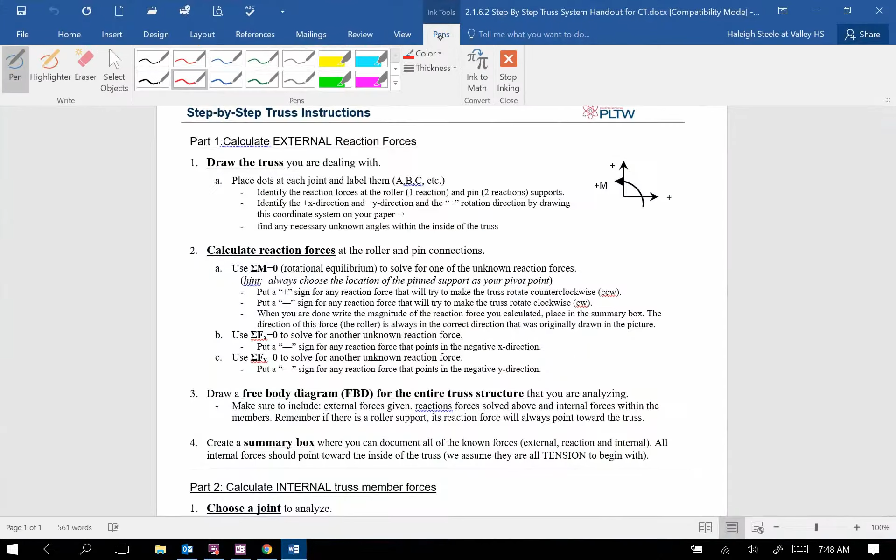So let's look at our first example, and we want to make sure we walk through these steps. The very first thing that we are going to do is draw the truss. We're going to place dots at each of the joints and label them, and identify the reaction forces at the roller and pin support, and find any necessary unknown angles within the truss if they are not given. So let's do those steps first.

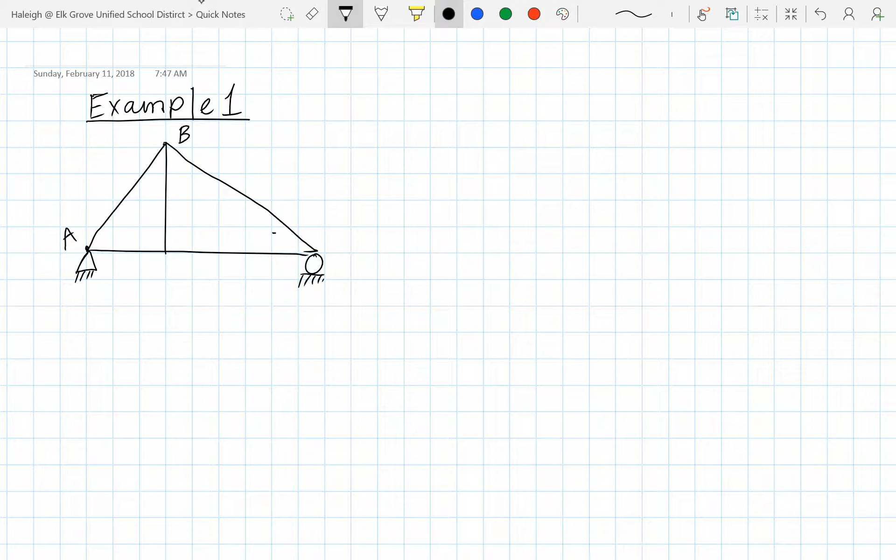So let's draw our truss. Let's say here is example 1, and it's going to look something like this, with a pin support over here and a roller support over here. Let's label the joints A, B, D, and C. There's going to be an external force on joint D.

Let's say it's 500 pounds. We'll just call it F1. And let's put some dimensions on this truss. This is usually given to you. So let's say from A to D, this is 3 feet. The distance from B to D is 4 feet. And from D to C is 7 feet.

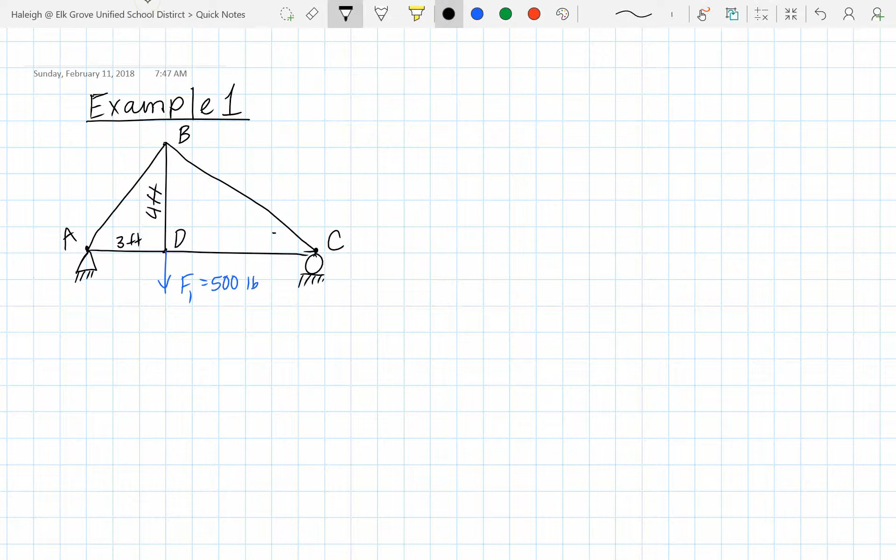Well, to do any truss calculations, you need at least one angle in each of the right triangles you see. So that would mean we need this angle here and this angle here. So let's find theta A, angle of A. So that's the step we're on, is find the angles.

So to find theta A, we can see that relative to angle A, we have the adjacent side, which is 3 feet, and we have the opposite side, which is 4 feet. So we're going to be using tan. Tan of theta A is opposite over adjacent, which means tan of theta A, now we plug in our values, is 4 feet over 3 feet. And to find theta, we need to take inverse tan. So theta A is inverse tan of 4 over 3.

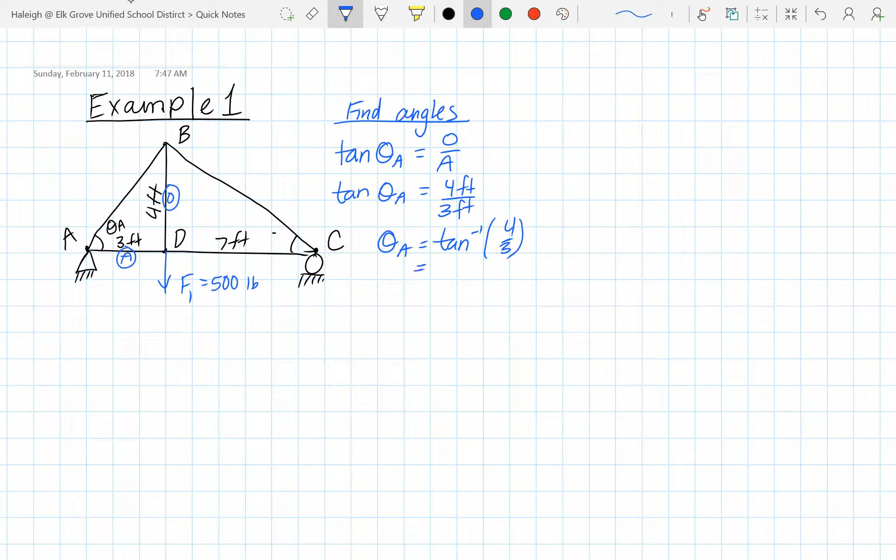When you plug that into your calculator, make sure you use inverse trig functions. I recommend doing this at the same time that I do it. Use your scientific calculator, you get 53.1 degrees. Okay, so let's replace that theta A with the correct value. So this is 53.1 degrees.

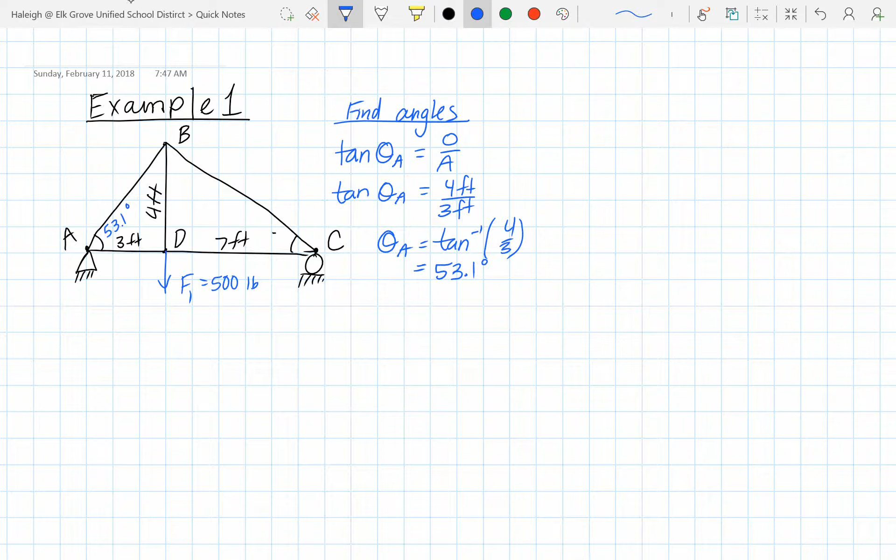Let's do the same thing, but this time for theta C. Well, for theta C, 4 feet is still our opposite side, and 7 feet is our adjacent. So we're going to use tan again. Tangent theta C is opposite over adjacent. So theta C is going to be inverse tan of opposite over adjacent. Let's plug in our actual values. We get 4 over 7. And if you plug this into your scientific calculator, you get 29.7 degrees.

All right, let's go back to our step-by-step instructions sheet and see what's next. Well, let's see what we've covered already. We did this, draw the truss, we placed dots at each of the joints. We found unknown angles, but we didn't identify any of the reaction forces at the roller and pin.

So let's do that. Okay, so our reaction forces, we know there are two at a pin support. We know there is an up reaction force and a horizontal reaction force. And on a roller, there's only a vertical reaction force.

So we call this reaction force. Since it's at joint A, we're going to call it RA. And since it's up, it's going to be, or in the vertical, it's going to be RAY. This one is also RA, but since it's horizontal, it's RAX. This one is vertical, so it's RCY.

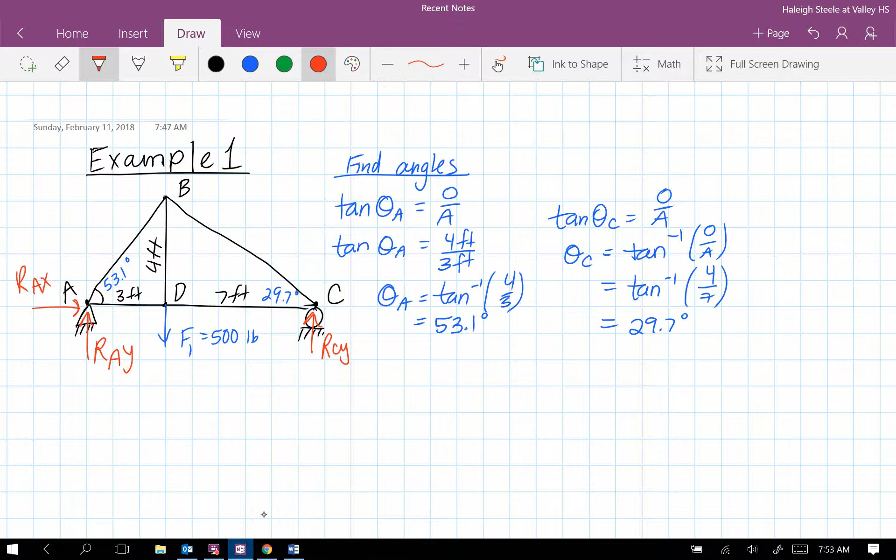Okay, we always assume that the reaction forces are in the positive direction. So for the vertical component, it's always up. For the horizontal, it's always to the right. Okay, let's see what's next.

Okay, so we are now on step 2, which is calculating the reaction forces at the roller and pin connections. How we're going to do that is summing up our moments to find one of the reaction forces. We want to make sure that we always choose our pin location as our pivot. It's really important because that has two reaction forces, and that way we can eliminate two of them right off the bat because they are no distance away from the pivot.

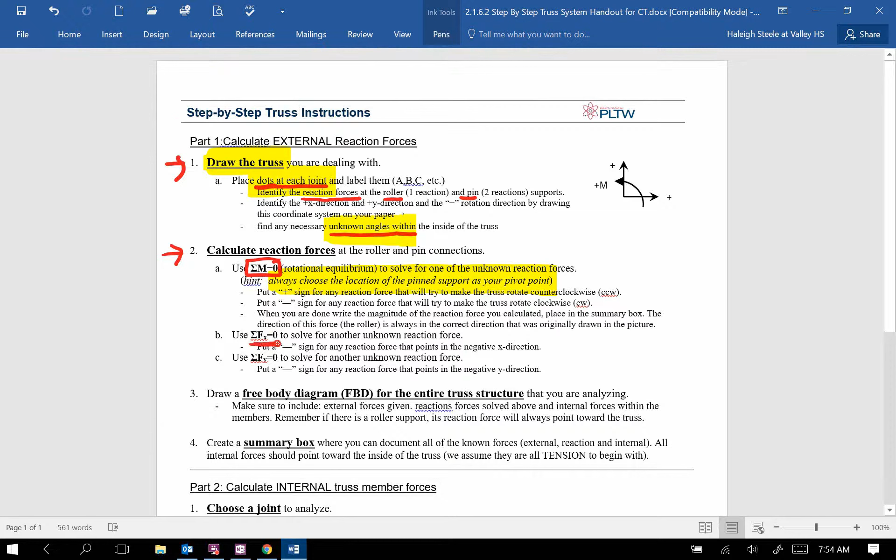Okay, so let's do this. We can go ahead and talk about these next two steps also, which is summing up the forces in the x direction and summing up the forces in the y to find the unknown reaction forces.

Okay, so we want to sum up our moments. Since we set point A as our pivot, there is no moment due to RAY or RAX. There is going to be a moment at point D because there is a force applied at point D, an external force, and there's going to be a moment at C because there's a reaction force, and it is a distance away from point A.

Now we need to identify which is positive and which is negative. We need to make sure we look at our coordinate system, and we know that counterclockwise is positive. So if we apply a force at point D, that's actually going to cause the truss to rotate clockwise. So that is going to be a negative moment. Add a negative sign in front of MD.

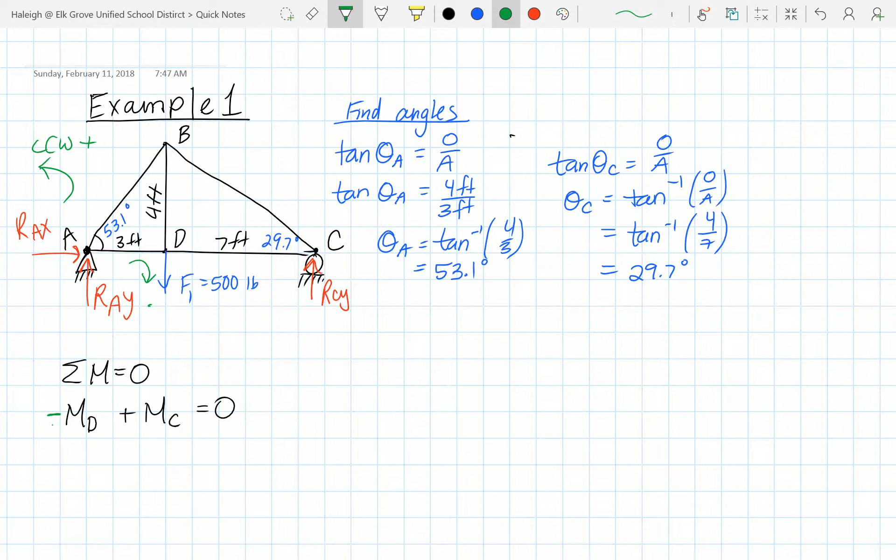And if we apply a force at point C, that moment is going to be counterclockwise, so it is positive. Now we can go ahead and actually use the equation for a moment, which is just force times distance.

We're looking here at the force applied at point D and the distance from D to the pivot point, which is point A, plus the force at point C times the distance from C to A. Don't forget that our force is always perpendicular to our distance. So since our two forces we're talking about here are vertical, we're going to be dealing with horizontal distances.

Let's plug in anything we know. We know the force at D is 500, so let's plug that in: 500 pounds times the distance, which is 3 feet, plus the force at C. Well, we don't know that, but we call it RCY based off of our picture. And we do know the distance is 7 plus 3, so 10 feet to point A.

Let's set that equal to 0, then let's solve. So we get negative 1,500 foot-pounds plus 10 feet times RCY. Well, we want to solve for RCY, it's like our unknown, it's our X. So we need to add 1,500 to both sides.

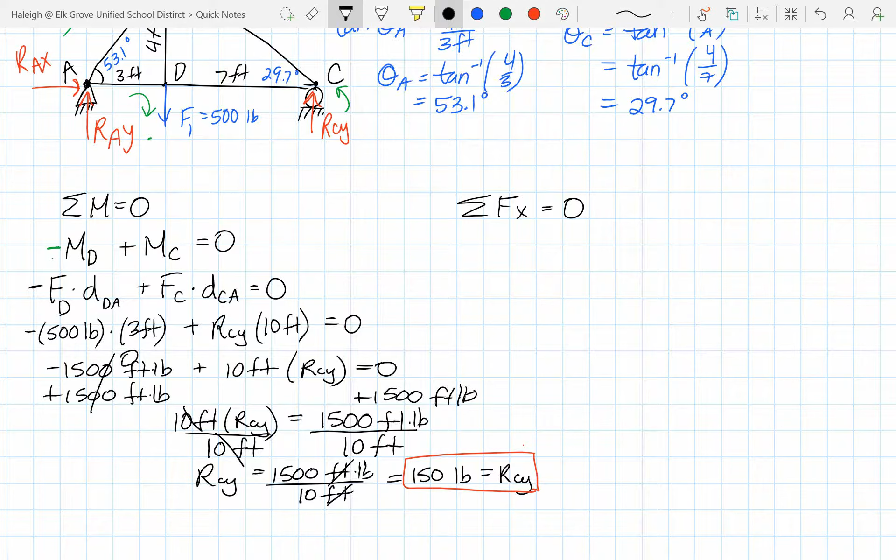Now we're going to follow the next steps, which is sum of the forces in X and sum of the forces in Y must equal 0. Let's deal with X first. Looking back at our picture, we need to look at any of the forces that are in the horizontal. Well, the only force is RAX. Since there is no other, that means RAX must equal 0 pounds. Let's box it because we're going to need it later.

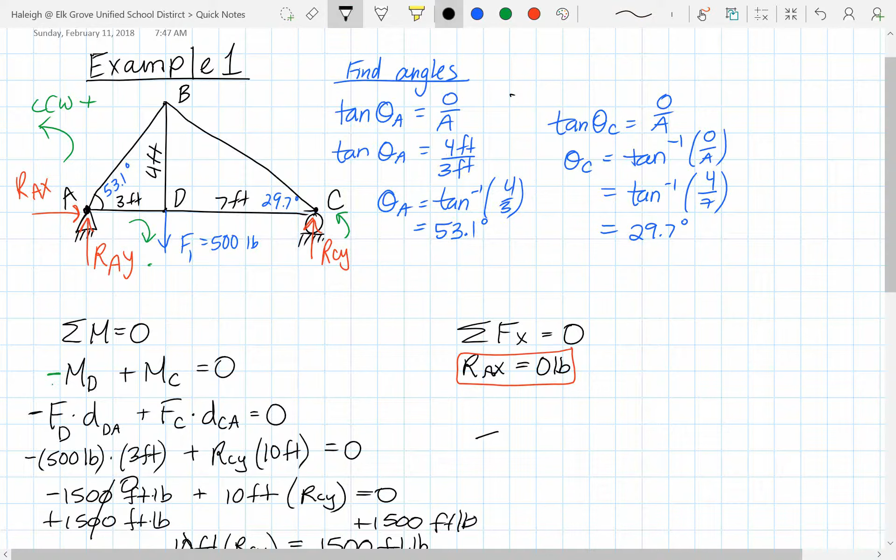Now we want to sum up our forces in the Y. So we need to write all of our forces that are in the Y direction or the vertical, which if we look at our picture, it's RAY, 500, and RCY, which equals 0. Don't forget to make anything negative that's pointing down. So in this case, the 500 is pointing down, so it's negative.

Let's go ahead and fill in anything that we have already found. In the previous step, we found RCY, so plus a negative 500, same thing as minus 500, plus 150 equals 0. If we add negative 500 plus 150, that's really negative 350. So we have RAY minus 350 equals 0. To get RAY by itself, we add 350 on both sides, so we get RAY equals positive 350.

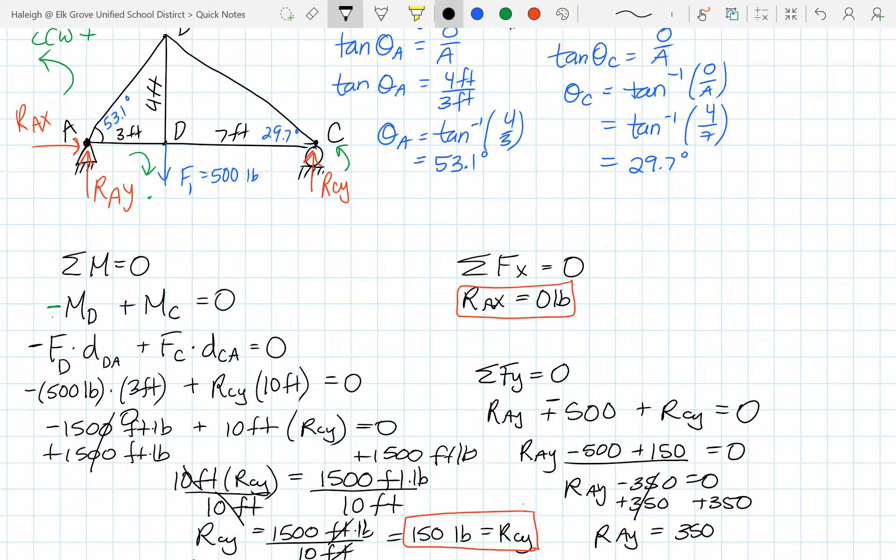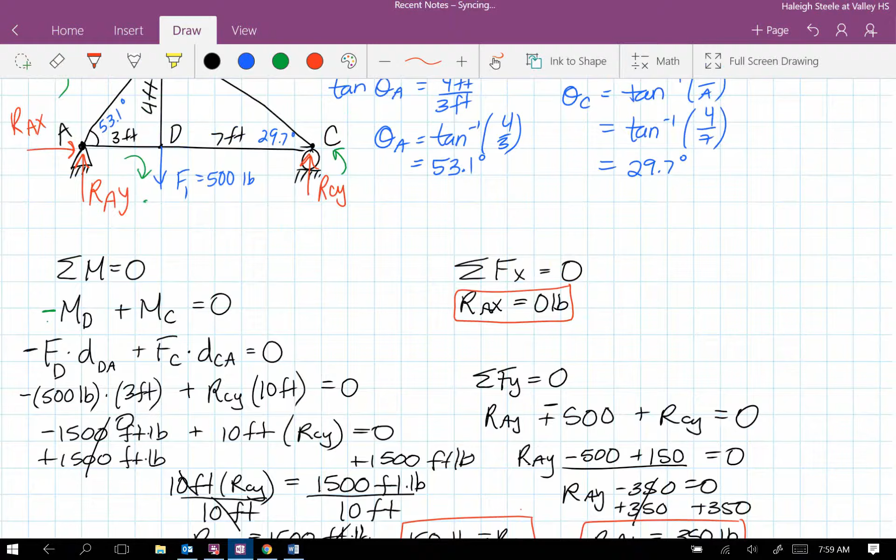There's another force, so we want to box it. All right, we have found all the reaction forces, and we know the external force is 500. So let's go back to our step-by-step instructions and see what's next. We are moving right along to step 3.

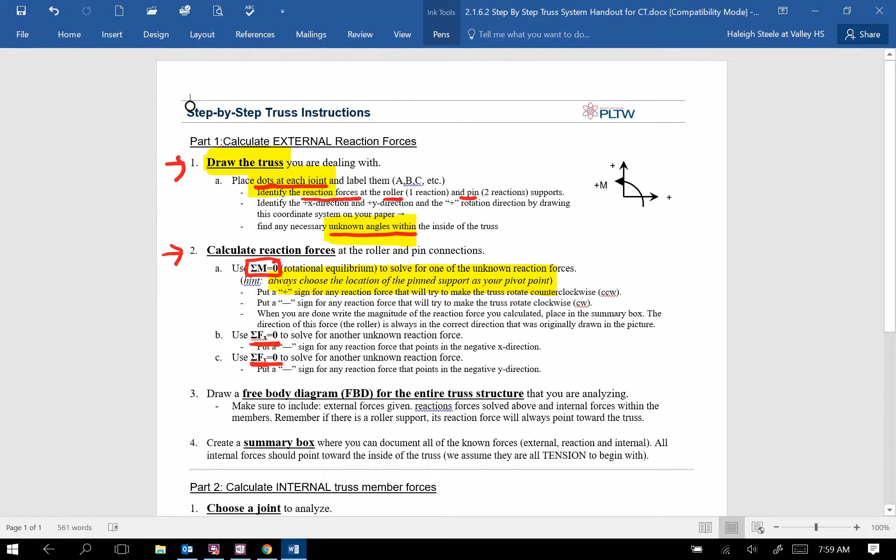Step 3 is to draw a free body diagram for the entire truss structure you are analyzing. We want to make sure we include all external forces, reaction forces, and internal forces, which is the new part. Internal forces are the forces that exist within the members. Let's do that.

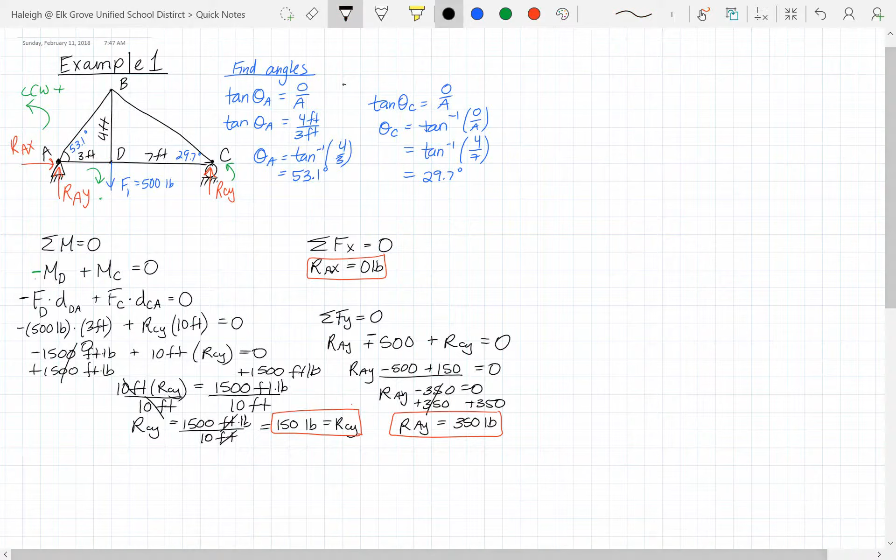I like to basically just draw all the joints first, relative to each other. We had joint A here, joint B up here, D right below point B, and joint C off over here. So we can kind of see it's in the formation of our actual original picture.

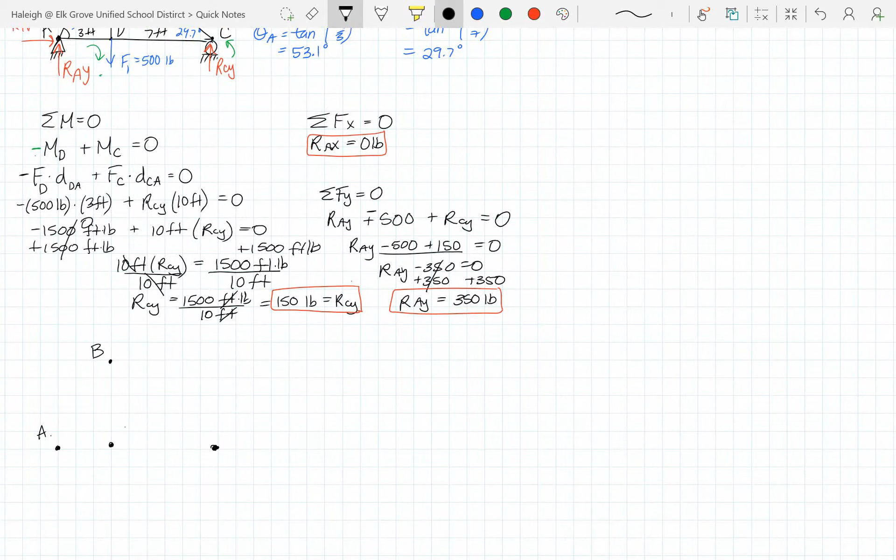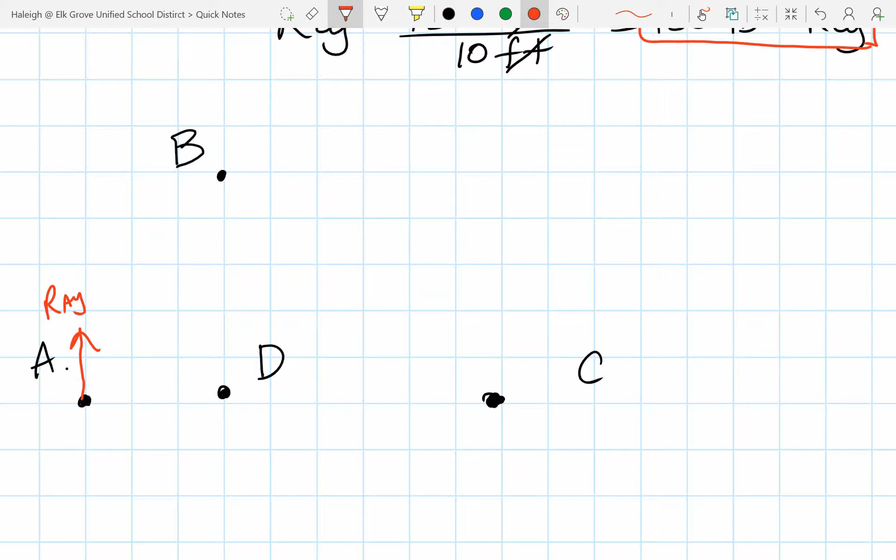Now let's draw our reaction forces first. On joint A we had RAY, and we knew it was up, so we point it up. At joint C we had RCY. We did have RAX, but since we calculated it to be 0, we're not actually going to draw it on our free body diagram because the force is 0, we don't need to draw it.

So let's draw our external force. At joint D we had F1 down.

Now we need to draw all the internal forces. Between joints A and B, there's a member, so we're going to have a force pointing in towards the joints. Since it's between points A and B, we'll label it FAB. Same thing with this one, FAB. It doesn't really matter whether you call it FAB or FBA.

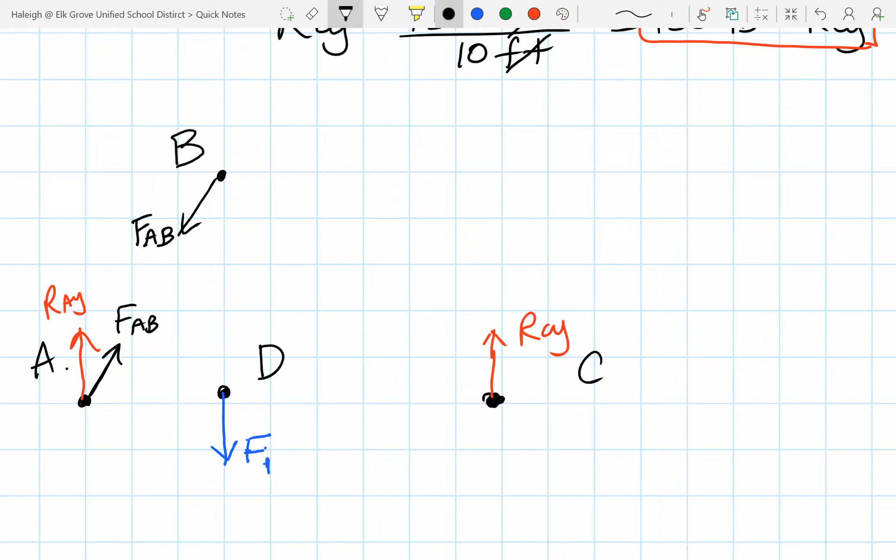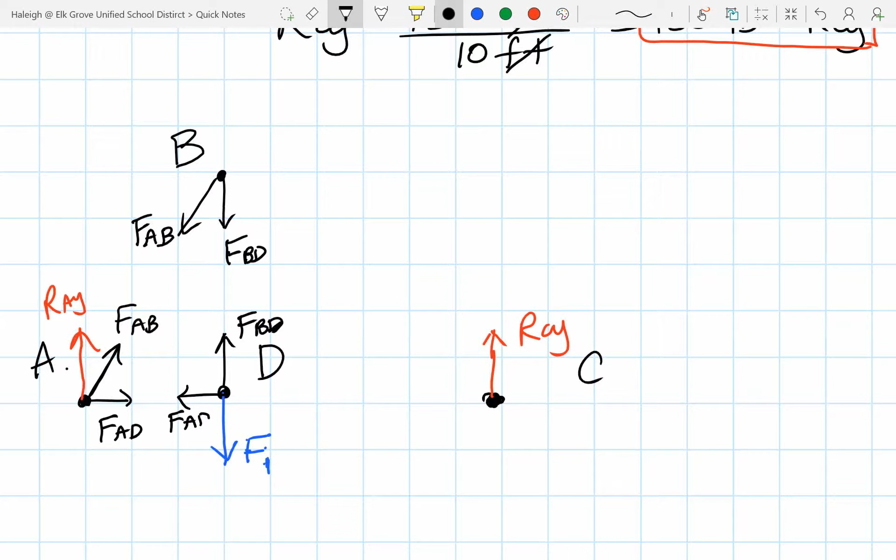Between B and D, always point the arrows toward each other, we always assume positive. So FBD. Then between joints A and D, we have FAD. Two more: we have FDC and FDC. And between joints B and C, FBC and FBC.

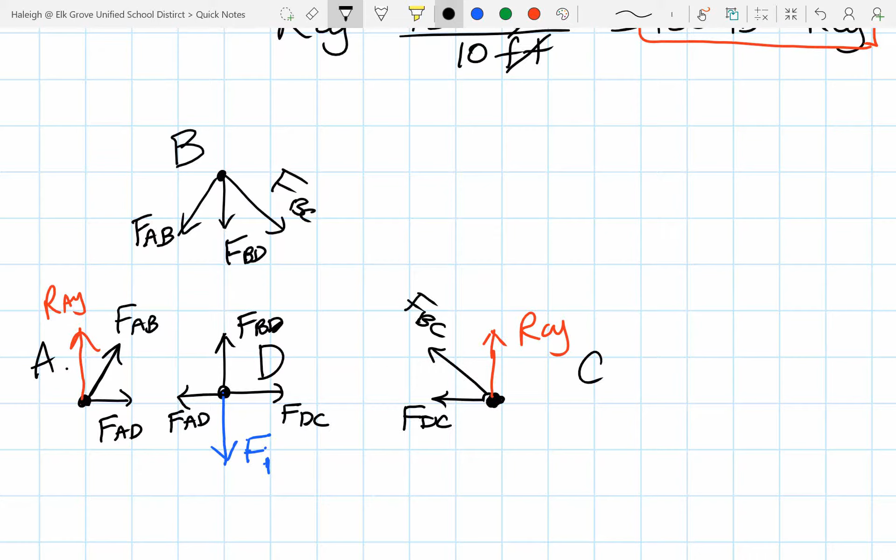Let's go back to our step-by-step instructions and see what's next. So we did our free body diagram. Let's make sure we create a summary box next, where we can document all of our known forces: external, reaction, and internal.

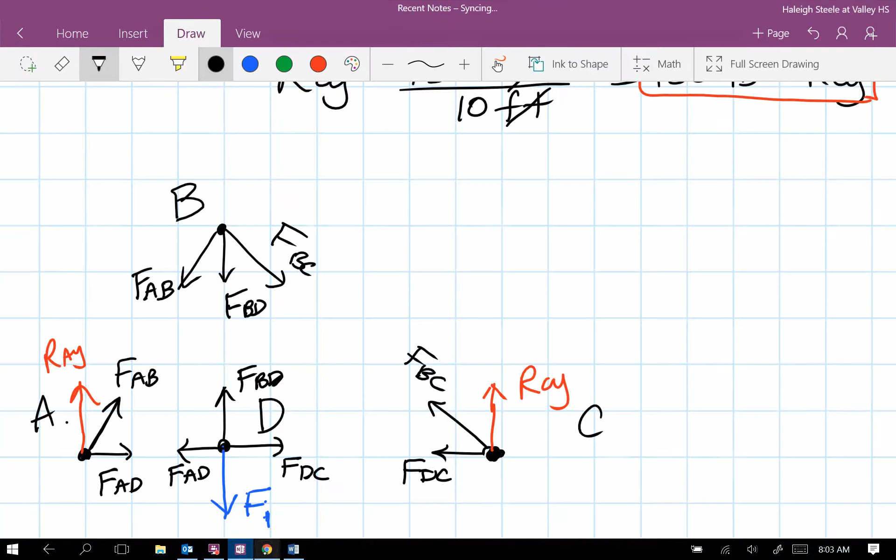All internal forces should point toward the inside of the truss. We assume they are all in tension to begin with, unless they point outside of the truss after we've calculated, then we make them compression forces. So let's make a summary box. Somewhere on your sheet, I always like to do it at the upper right-hand corner.

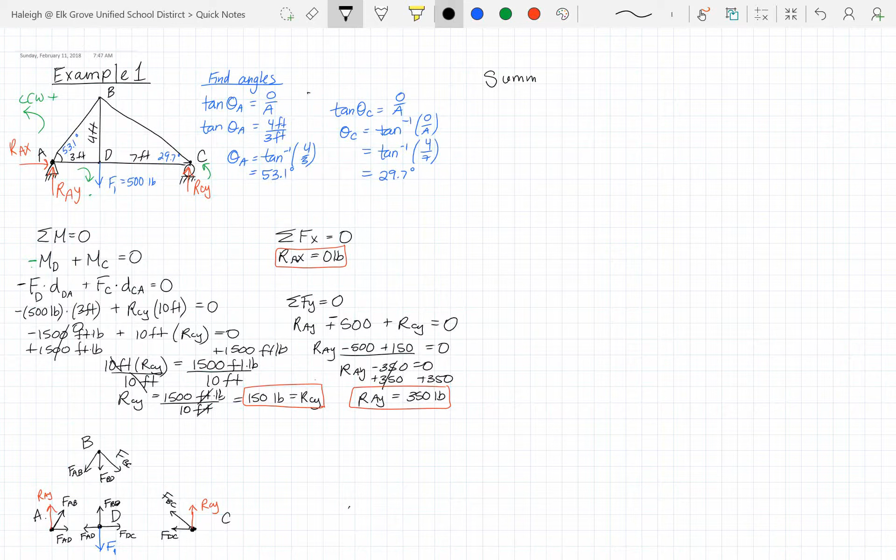We're just going to list all of our forces. I always start with the external forces. F1 was our only external force, and it was 500 pounds. Since it was pointed down, it was negative. Then I go to the reaction forces. We had RAX, RAY. RAX was 0, RAY was positive 350, and RCY was positive 150.

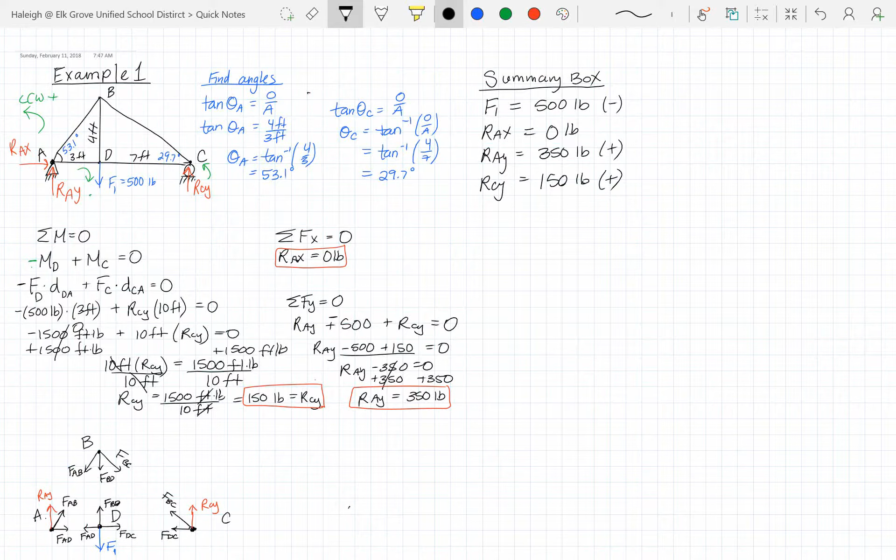Then we list all the internal forces, which are the forces we have to solve for next. Go back to your free body diagram. We have FAB, FBD, so I'm going to start with joint A. We had FAB, also on joint A is FAD. Then joint B—since we already listed FAB, we don't need to list it again. We have FBD and FBC. Oops, said FBD, but I wrote BC.

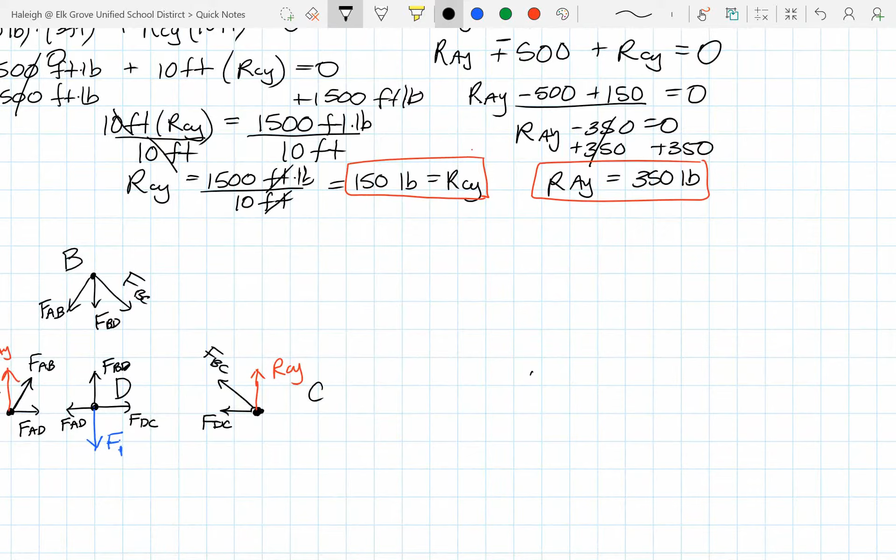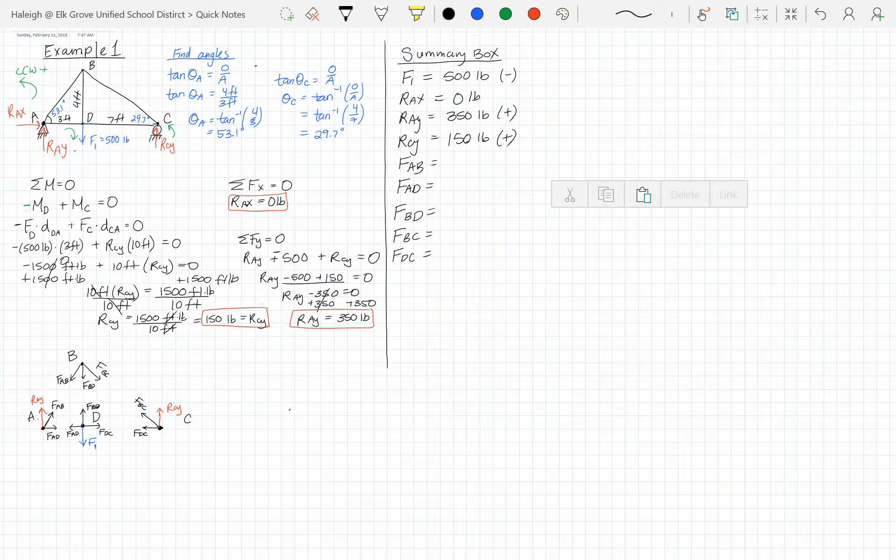There we go. Then we have to identify any other internal forces, which looks like what's left at joint D, we have FDC. So let's add that one. A good rule of thumb to help you remember is that however many members you have is how many internal forces you're going to have. We have member AB, BD, AD, DC, and BC, which is 5. So we should have 1, 2, 3, 4, 5 internal forces.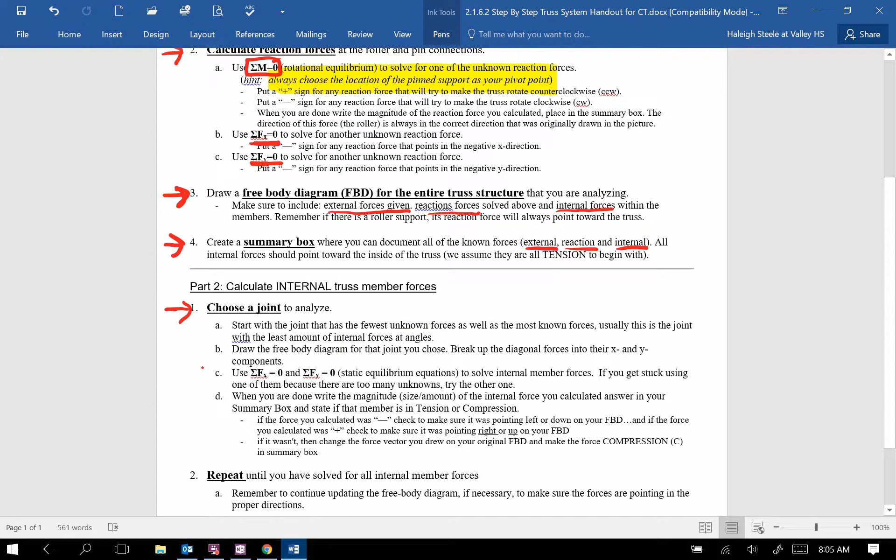Let's go back to our step-by-step instructions and see what's next. We need to choose a joint to analyze. Step A says start with the joint that has the fewest unknown forces as well as the most known forces. Usually this is the joint with the least amount of internal forces at angles. I always start with the pin support, or our pivot, which is always our pivot.

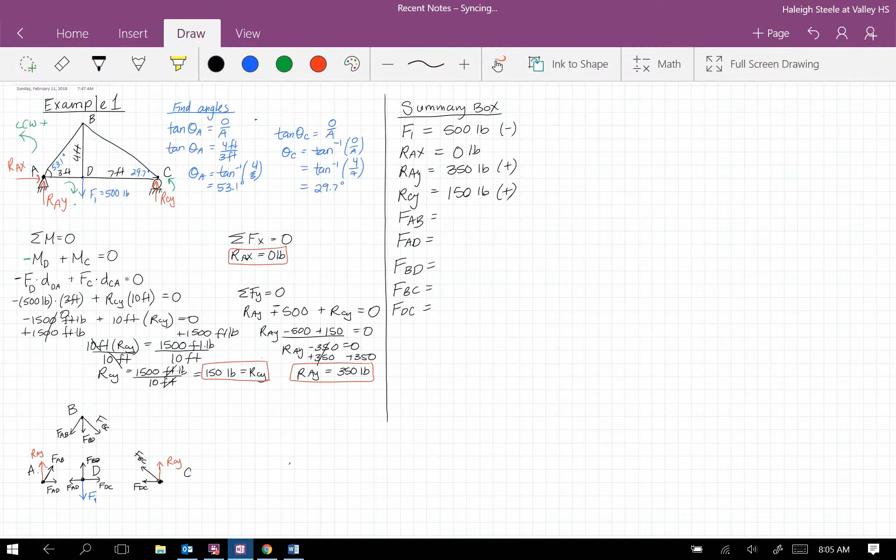So this is always the pivot. Then we draw a free body diagram of that particular joint. Again, we break up the diagonal forces into their X and Y components. Let's do that. Since we're going to start with our pin support, we have joint A, so we're going to write joint A.

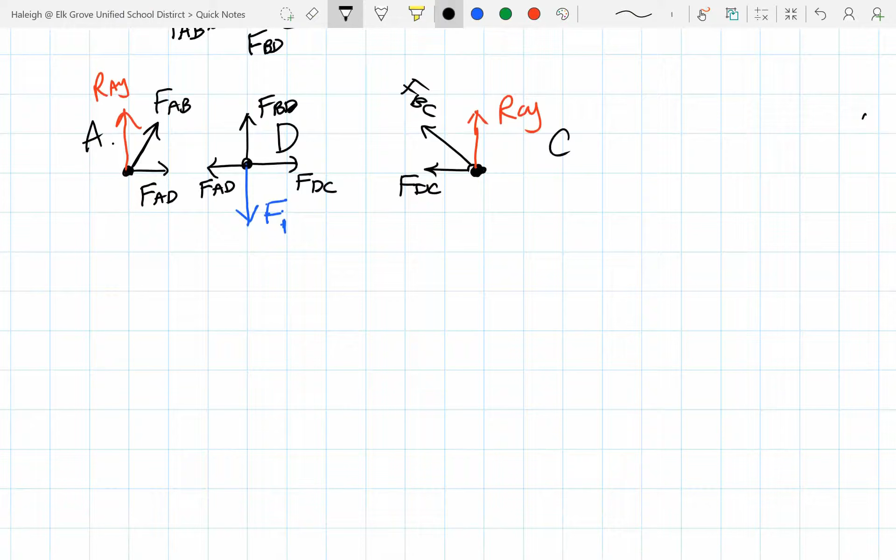And then we're going to draw a free body diagram, but this time we're going to break up the diagonal forces into their X and Y components. So here is FAD, which is not diagonal, it's horizontal, so it's already good to go. RAY is vertical, so nothing to break up there. I am going to draw the diagonal force a different color so we can deal with it.

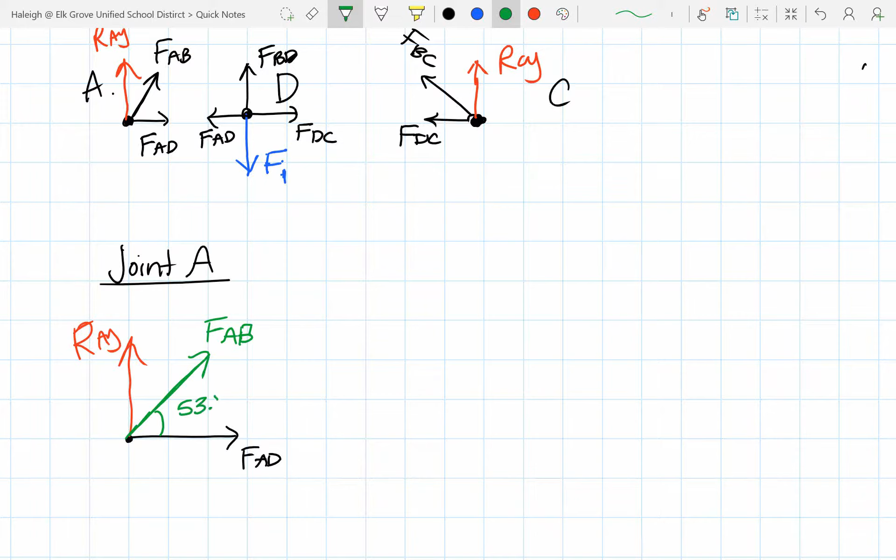So this diagonal force is FAB. And if we remember back to our original picture, we solved for this angle, which was 53.1 degrees. So using your prior knowledge, we can break up FAB into its horizontal, so its X component, and we'll call this FABX, and its vertical, FABY. Since we don't want to introduce any new forces, we want to get FABY and FABX in terms of the angle that's given as well as FAB.

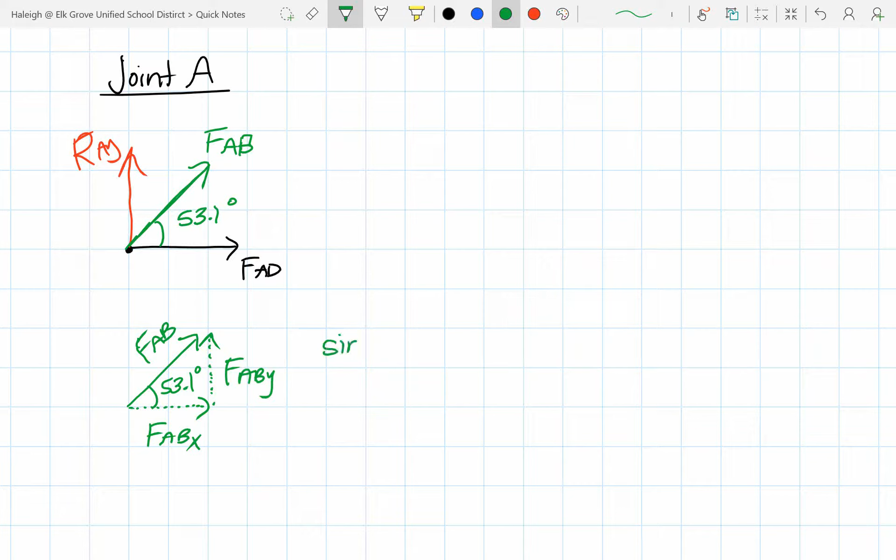So how we do that is we use our trig functions. Since FABY is the opposite side and we want to always use FAB, the hypotenuse, we're going to be using sine. So sine of 53.1 degrees is opposite over hypotenuse, so FABY over FAB. Well, when we solve for FABY, we want to multiply FAB on both sides. And we're left with FABY is equal to FAB times the sine of the angle.

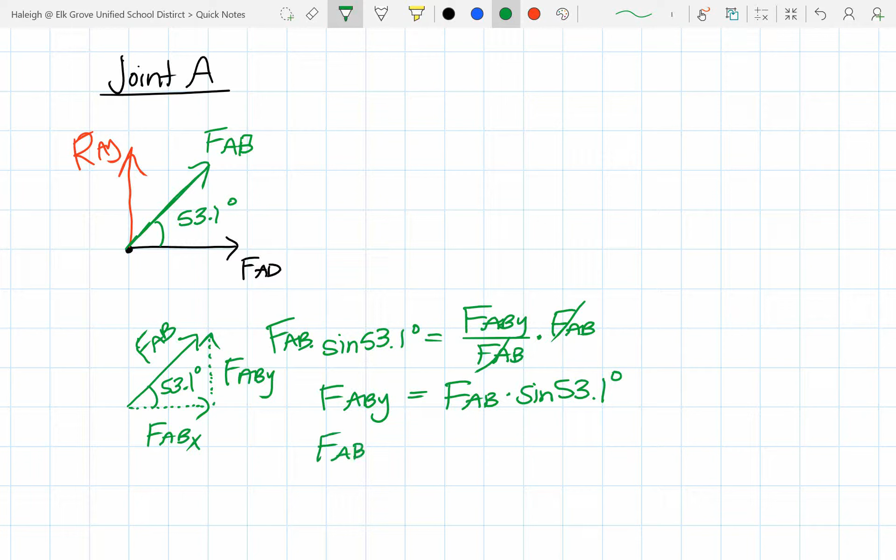So at this point, you can go ahead and jump right to the conclusion that the y component, or the opposite component of the angle will always be sine, and the adjacent component will always be cosine. So FABX is going to be the same thing, but cosine. You don't have to go through the process of showing me this step every time. Opposite is always going to be sine, adjacent is always going to be a cosine.

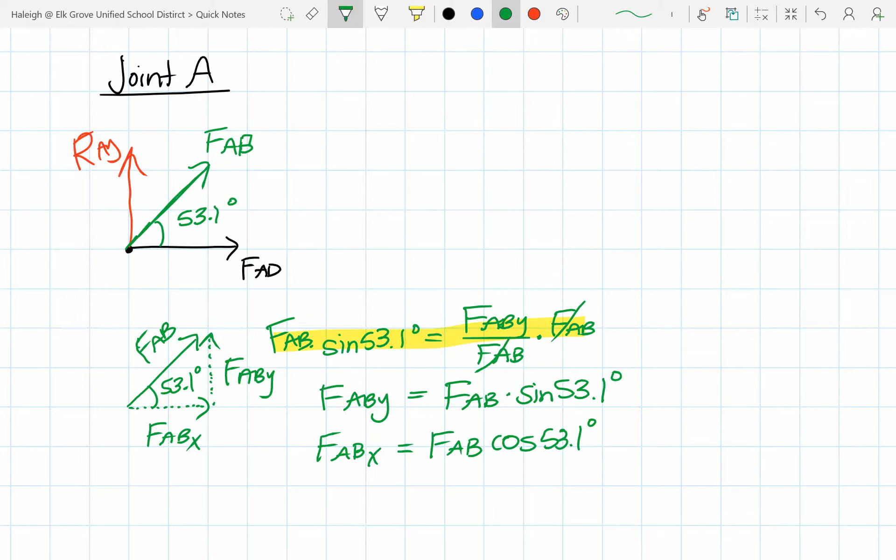Okay, so let's go back to our step-by-step instructions, see what's next. All right, the next step is to use sum of the forces in the x equals 0 and sum of the forces in the y equals 0 to solve for the internal members. After we're done with that, we are going to write the magnitude, which is just the size or the amount of the internal force, in our summary box, and we're going to state whether it's in tension or compression.

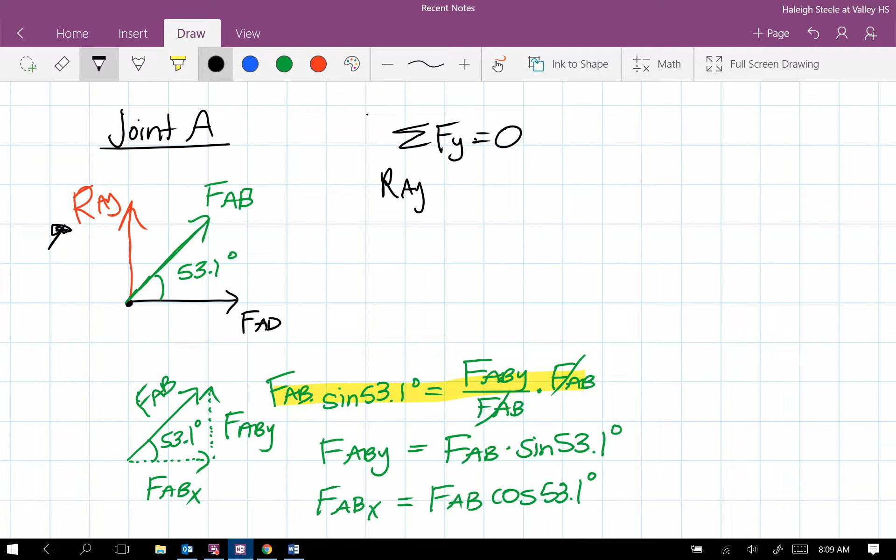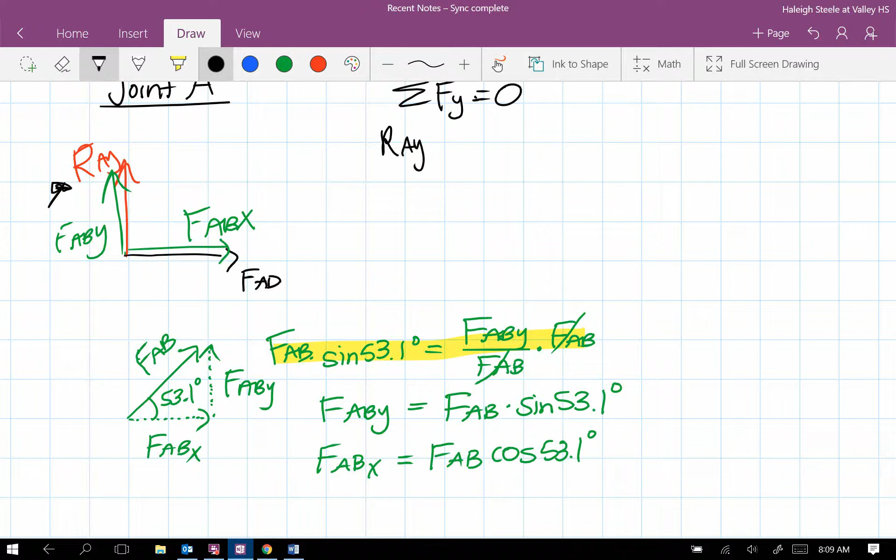So let's do that. Let's start in the x direction or y. It really doesn't matter. In this case, since I already know RAY, I'm going to start in the y direction. So sum of the forces in y must equal 0. So we have RAY is up, and let's replace this FAB with its components instead. So we had FABX and we had FABY.

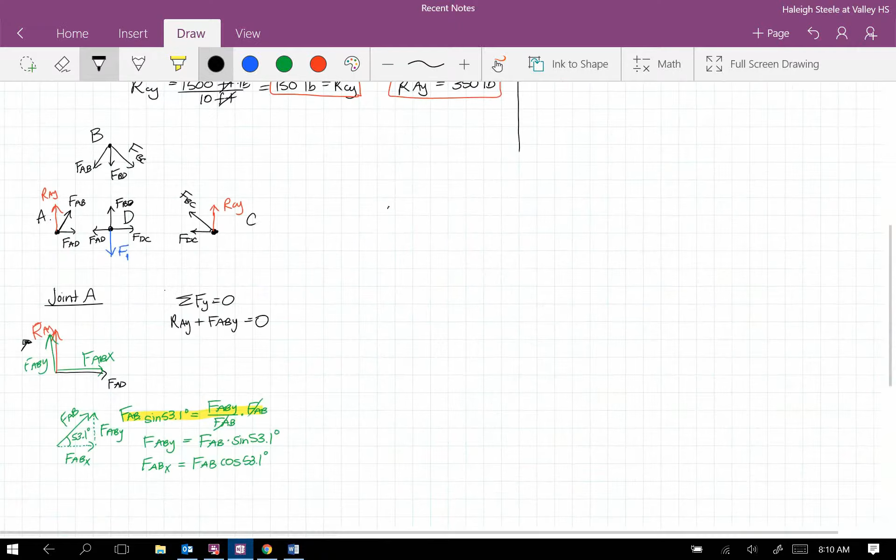Okay, so RAY plus FABY must equal 0. Let's plug in anything we know. We know that RAY was, go back to your summary box and look, 350. So let's plug in 350 here, plus FABY, well, we're using this equation right here, which is FAB sine 53.1 degrees, and set it equal to 0. Our unknown is FAB, so let's solve. Let's subtract 350 on both sides. And then we're going to divide by sine 53.1 on both sides.

So this is where you're going to need a scientific calculator. So we have FAB equals negative 350 divided by sine of 53.1. When you solve for this, you should get a negative 437.7 pounds. Since this is another force, we need to box our final answer and then put it in our summary box.

Okay, but before we put it in our summary box, let's look at what the negative means. So we predicted FABY and FABX to be positive, but what's actually happening here is FAB comes out as negative, which means in reality, instead of FAB pointing this way like we predicted it to be, a tension force, it's actually pointing the opposite. And this makes sense because if we look at, let's get rid of the ones that are not in the right direction. If we look at this free body diagram now, we can see that it is in equilibrium.

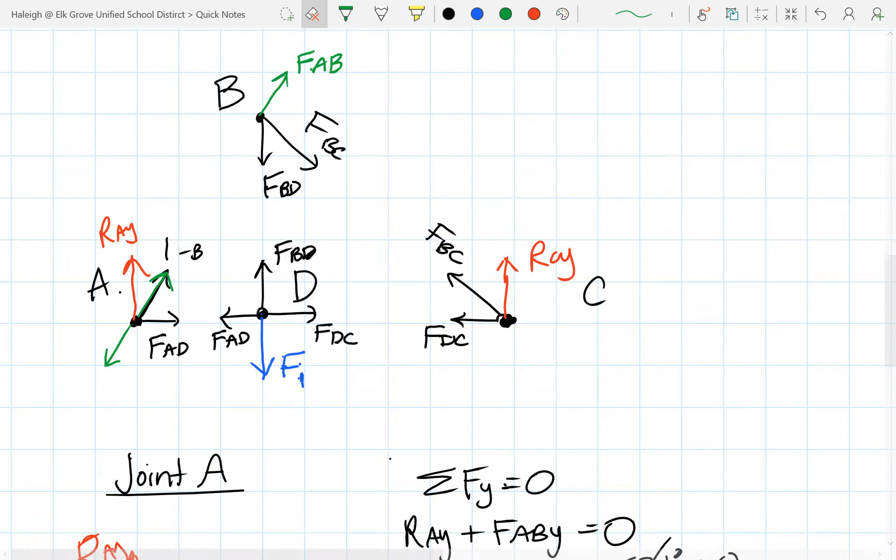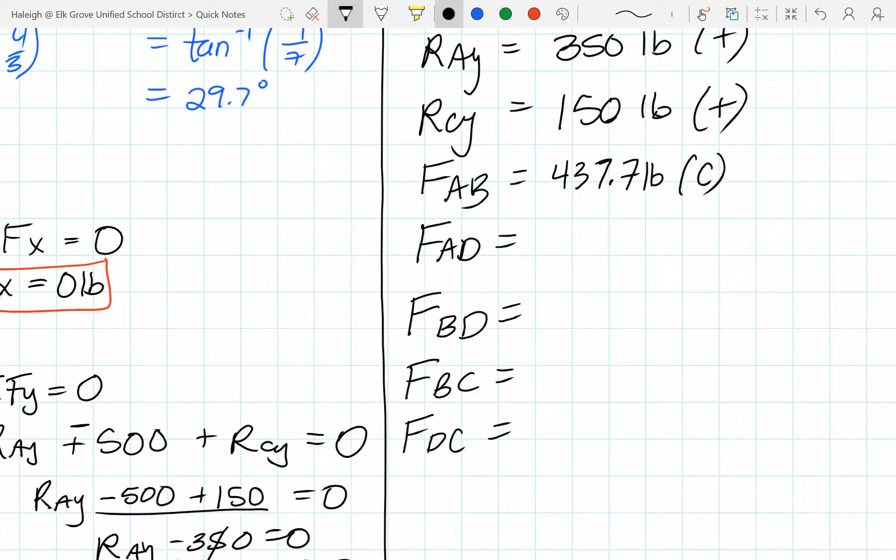Because at the end, you want your overall free body diagram of the whole truss to look like it's in equilibrium. All right, so let's go back and put that negative 437.7 into our summary sheet. So we're going to drop the negative, and just make it a compression force after. So put the letter C, because the negative only told us the direction. So we care about whether they're compression or tension forces.

Okay, so we're almost done with joint A. There is still one more force at joint A that we have yet to solve for, which is FAD, and it's in the X direction. So let's do the exact same thing we just did with the Y, but in the X. So in the X direction, we have FAD plus our FABX equals 0. But instead of FABX, we always write it with the sines or cosines: FAB cosine 53.1 equals 0.

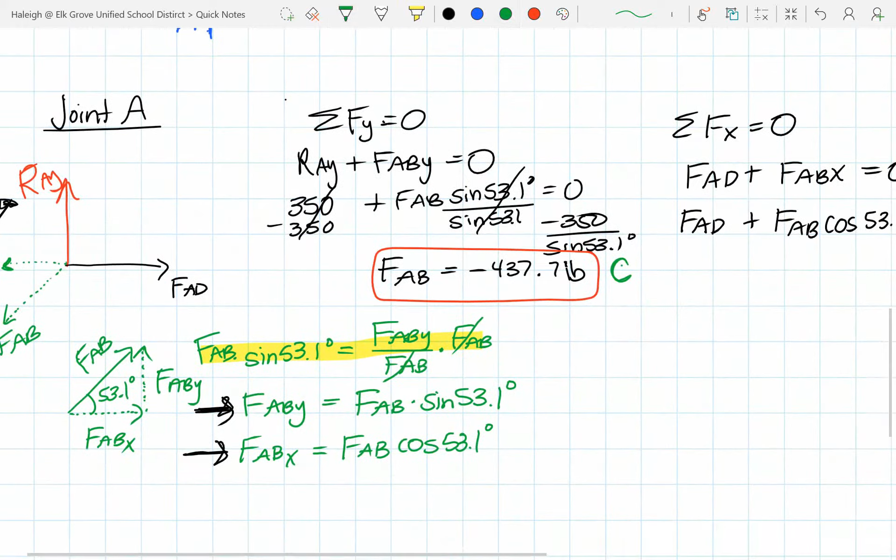Since FABX is actually a component of FAB and we discovered that it's pointing negative, we need to make our FABX negative. Now when we solve for FAD, we get FAD. If we add FAB cos 53.1 to both sides, we get FAD equals FAB cos 53.1. So that's what FAD is.

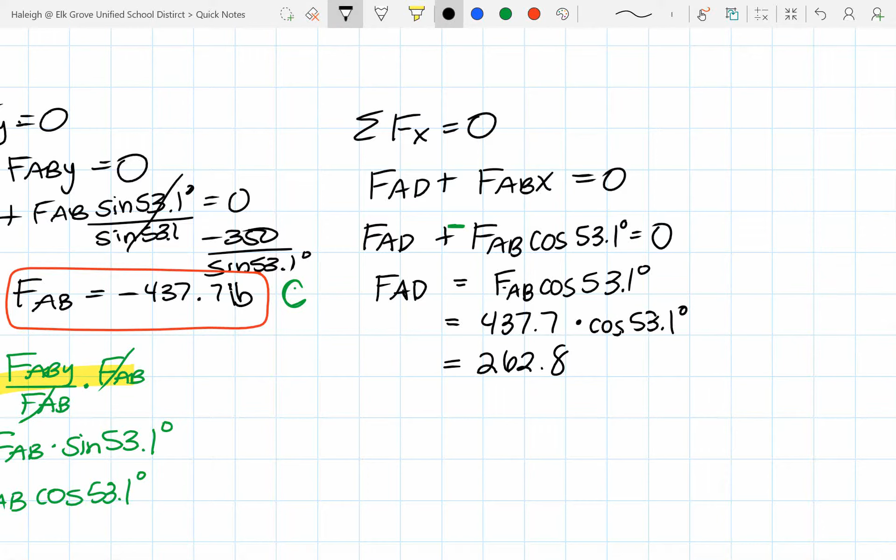Well, we already found FAB. It was 437.7 times cosine 53.1 degrees. So plug that in your calculator and we should have FAD. When we plug it into our scientific calculator, we get 262.8 pounds. In our free body diagram, we predicted it to be pointing to the right, which means it was positive. After we calculated it, it came out positive, which means our prediction of it being a tension force was correct, so we don't change its direction.

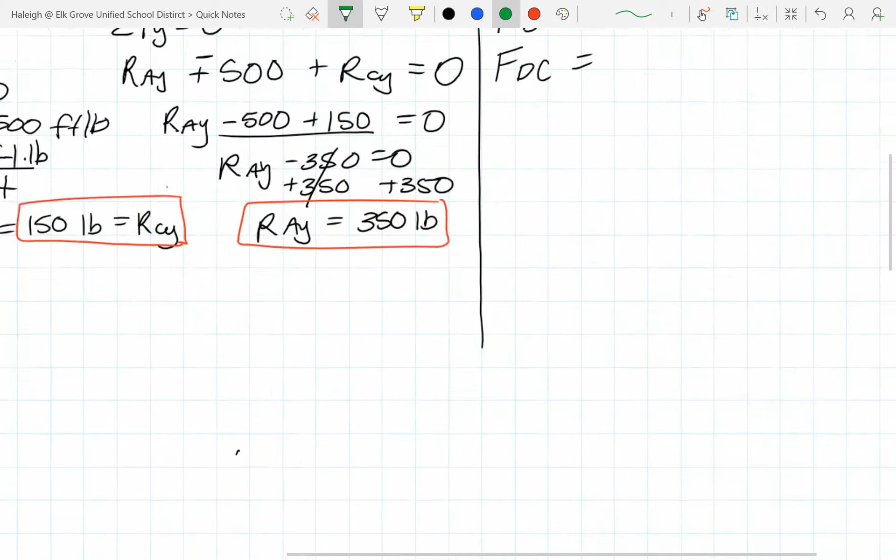It is correct, so let's add that to our summary box, and write the letter T for tension after.

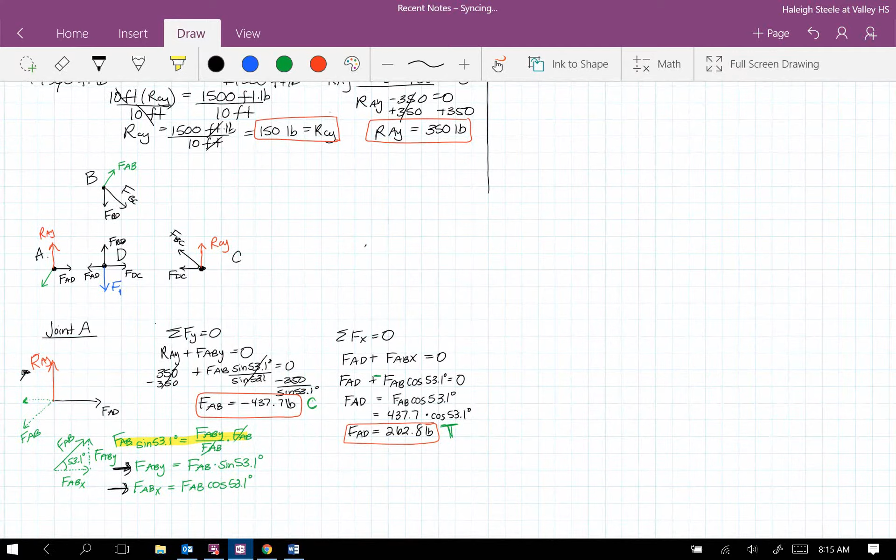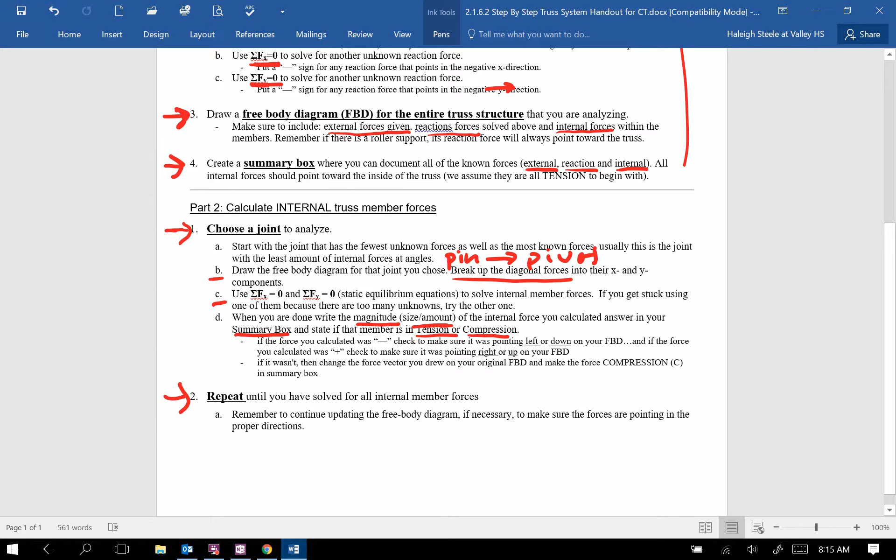Okay, so let's move right along here. After we deal with one joint, we have to deal with another, but let's make sure we're following these step-by-step instructions. We are at step 2, which is to repeat until we have solved for all internal member forces. The next step is to pick which joint we want to deal with next. We have to choose the joint that's easiest to solve.

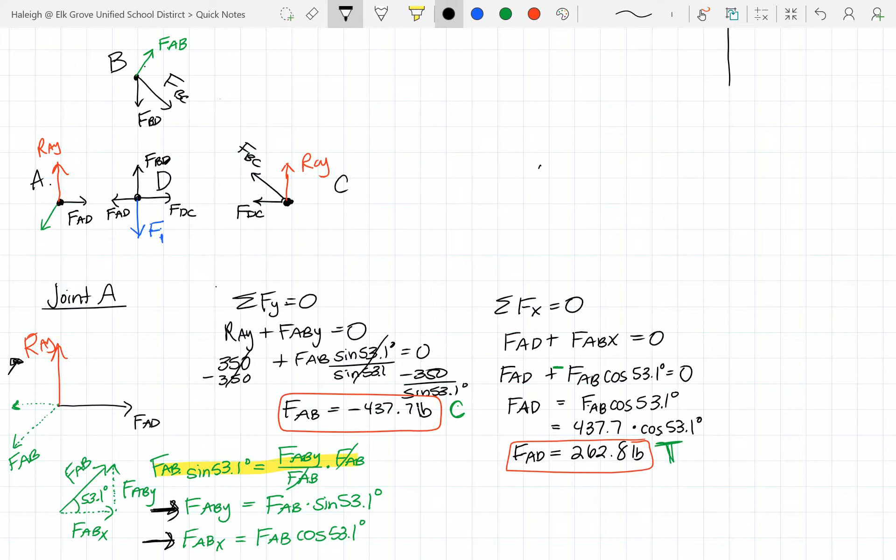Since we already solved joint A, I always think the second choice is going to be the one with the least number of diagonal forces. If we look at joint B, we can see FAB is diagonal and FBC is diagonal. If we look at joint C, we see that FBC is diagonal. And if we look at joint D, there's no diagonal forces. So our next easiest one would be joint D.

All right, so let's do the exact same steps we just did. We write joint D, we draw a free body diagram for it, the same free body diagram you drew before. And it had an external force pointing down, which we called F1, and it was 500.

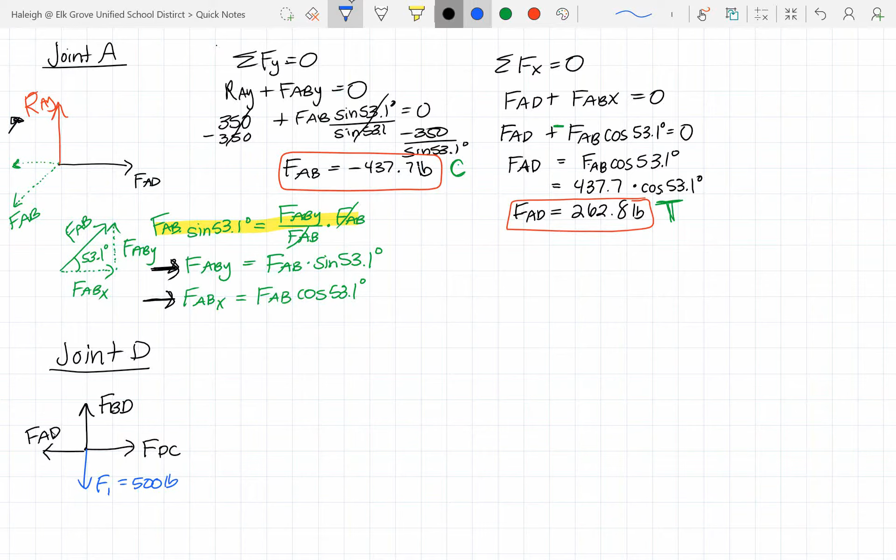Okay, so we get to skip this green step that we did earlier because there aren't any diagonal forces, and we get to jump right to summing up the forces in X and Y. I'm going to do the Y force again, first, because we know the 500, which is in the vertical. So sum of our forces in Y must equal 0. So we have force BD minus 500 equals 0.

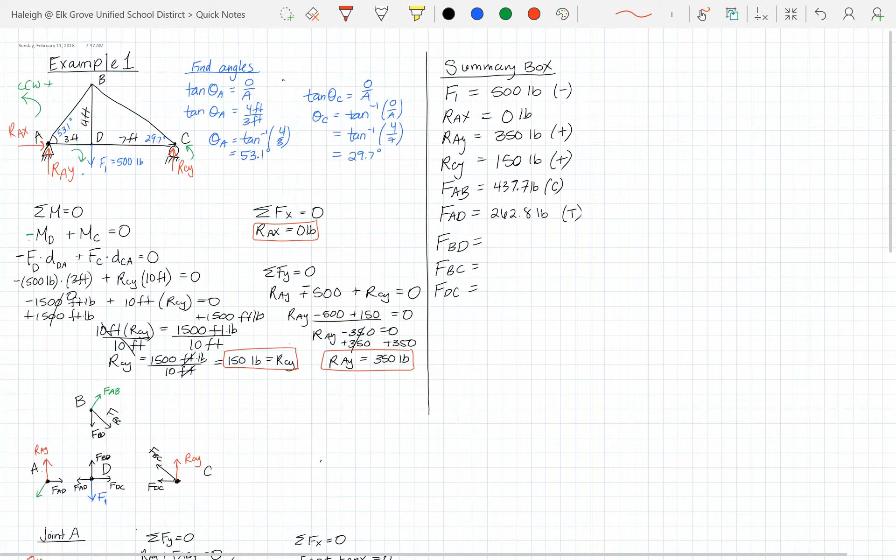And since 500 was down, it was negative. If we solve for FBD, we add 500 to both sides since it was negative, and we get FBD equals 500 pounds. Since it's positive, that means it must be pointing up, which it already is, so the force is in tension. Let's add that to our summary box: 500 pounds in tension.

Okay, let's go back to our joint D and do the same thing for the X. We have sum of our forces in X equals 0. We have two forces in the X direction, or the horizontal, which are FAD and FDC.

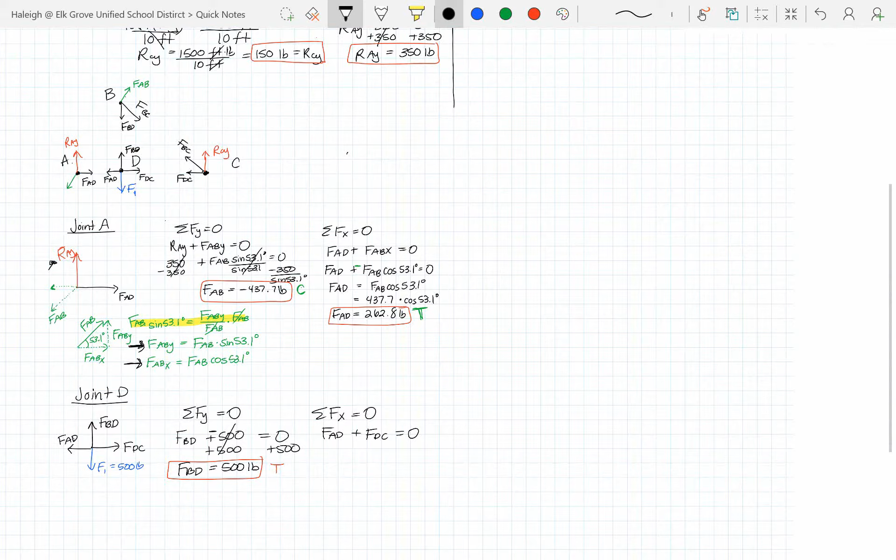Equals 0. Well, we already solved for FAD earlier. It was, going back to our summary box, 262.8. Let's write that in. But in this case, our FAD is pointing to the left, so we do need to make it negative: negative 262.8. So when we solve for FDC, we add 262.8 to both sides.

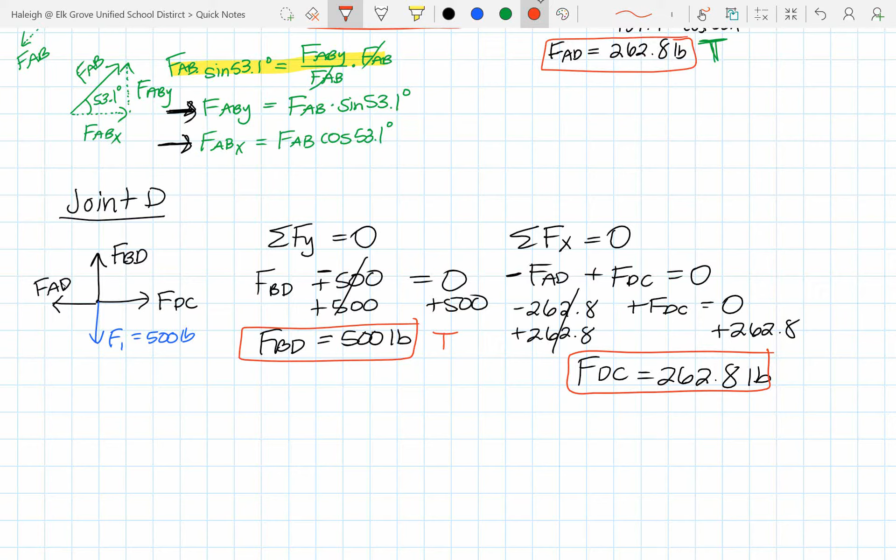We're left with FDC all by itself, which is great. We get 262.8 pounds. So we solved for another internal force, so we box it, and then we have to go back to our free body diagram and state whether it's in tension or compression. Well, we predicted it to be positive to begin with, and it is a positive number, so that must mean it's tension. So let's add that to our summary box: 262.8.

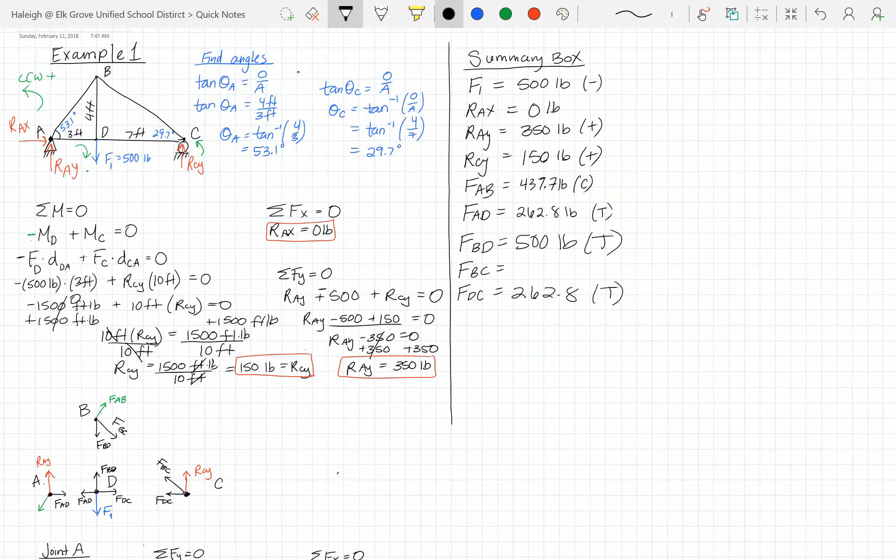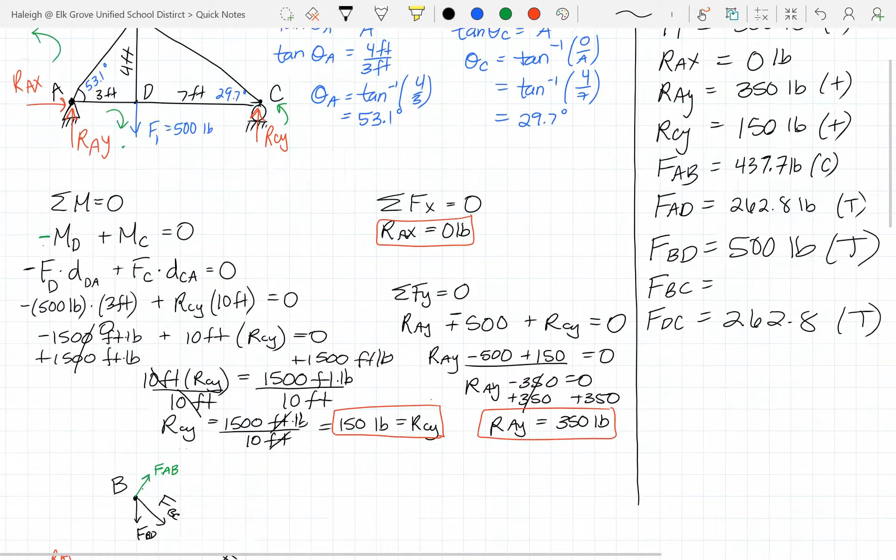Okay, we're only left with one internal force left, which is FBC. So that means we have to deal with joint B or joint C next. Let's go back to our free body diagram and look at what's easiest: joint B or joint C? If we look at joint B, like we did earlier, it has two diagonals, and joint C has only one. So obviously C is going to be the easier one to deal with. So let's draw joint C.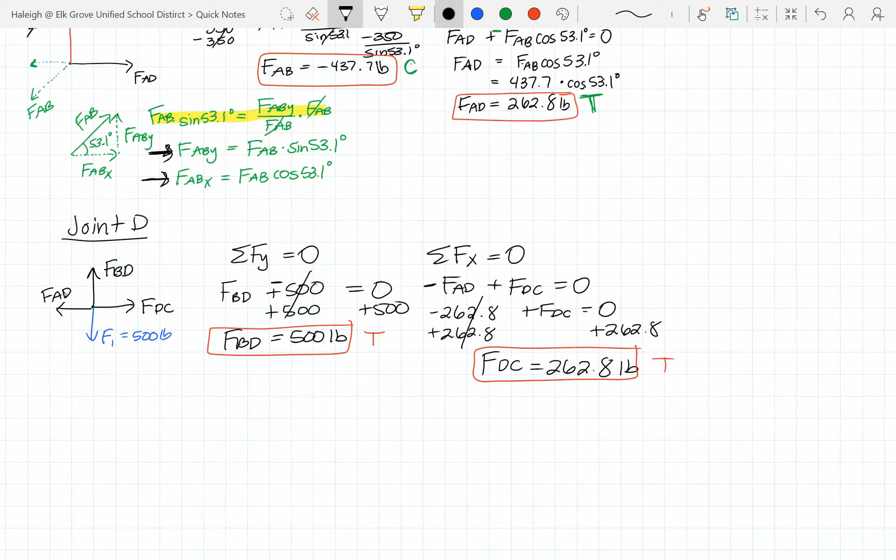Okay, here was our joint C. It had a reaction force pointing up, RCY, and it had FCD pointing toward the inside of the truss, which was the correct direction that we found earlier.

And then we have a diagonal force, which is FBC. And like we did with joint A, we have to actually break up FBC into its components. So that's what we're going to do next.

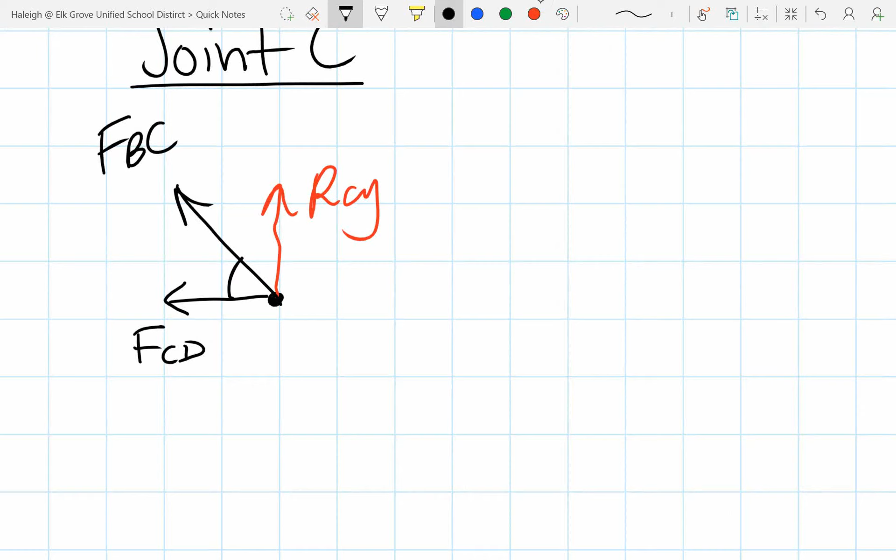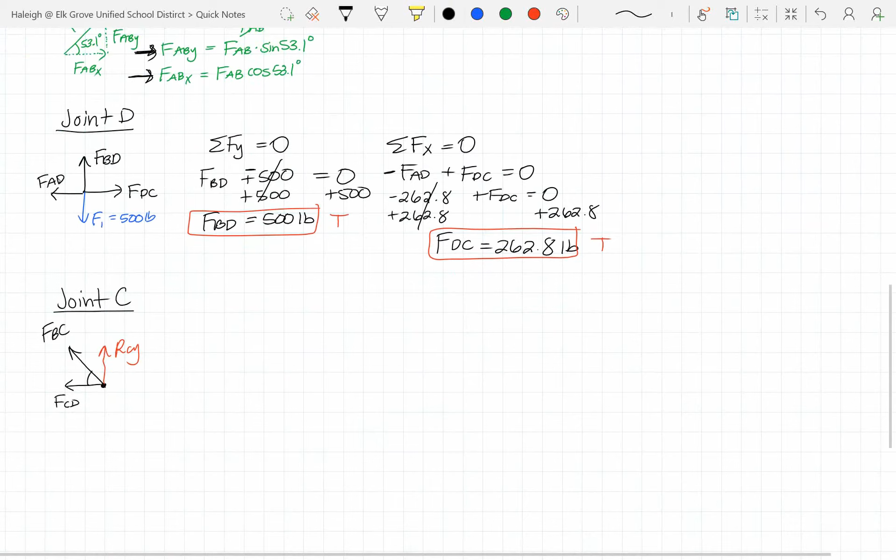This angle that we calculated earlier, if you can't remember it, go back up to the top. It was 29.7.

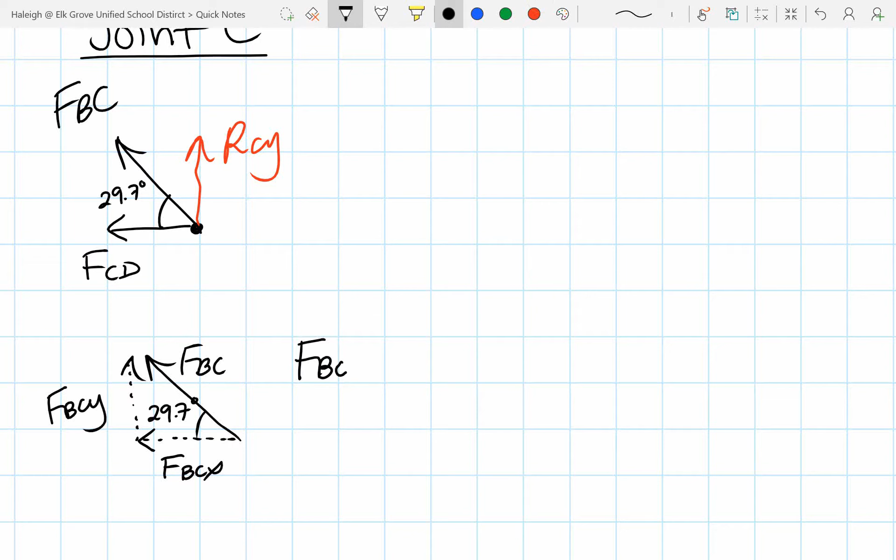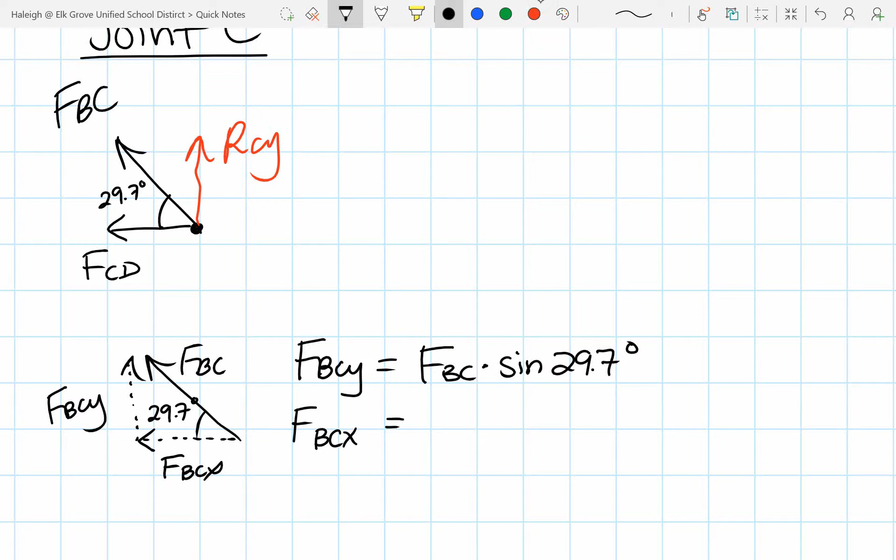So this is 29.7 degrees. Let's draw our force vector right here, FBC, and break it up into its components. So we have a left component, FBCX, and we have an up component, FBCY. Like I said earlier, you don't have to show your trig calculation anymore. You can just jump right to the conclusion that opposite is sine. So if we're finding FBCY, it's the force times the sine of the angle. And the adjacent is going to be the cosine.

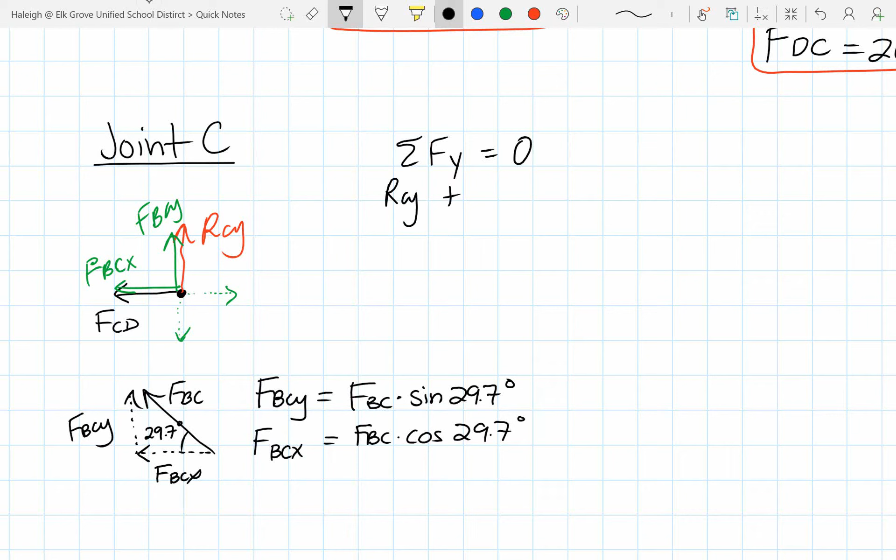So let's sum up our forces in the Y direction - it really doesn't matter, X or Y, because we know RCY and we know FCD, so whichever one you want. So let's sum up our forces in the Y direction equals 0. We have RCY plus FBCY equals 0. Well, we need to substitute our FBCY into our equation, which is RCY plus FBC sine 29.7.

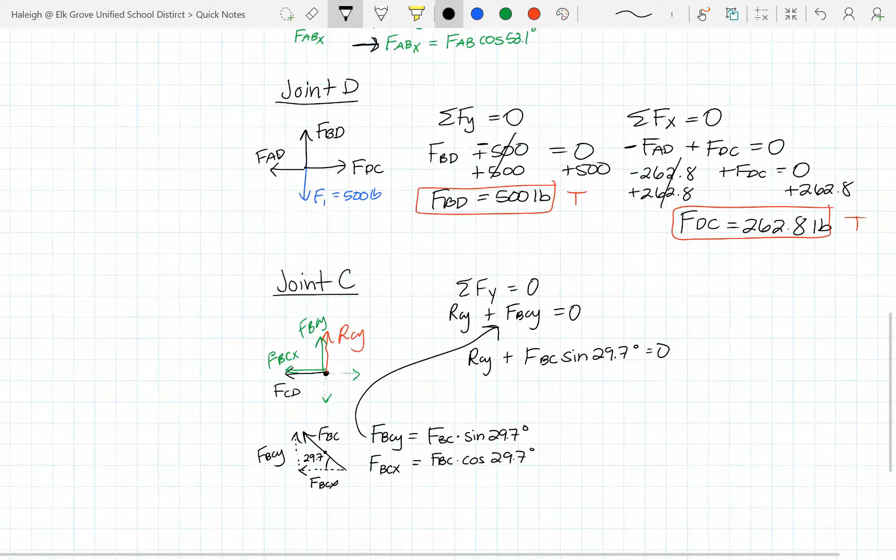Okay, well, RCY, I can't remember it, so I need to go back up to where we solve for it, or our summary box. There it is. RCY was 150. So now we can plug this in. This is positive 150 since it's pointing up.

And let's solve for FBC. So we subtract 150 on both sides. We get FBC times sine 29.7 degrees equals negative 150. So we know it's going to be a negative number, which means our prediction, this dotted vertical, is going to be correct. So let's finish out the problem.

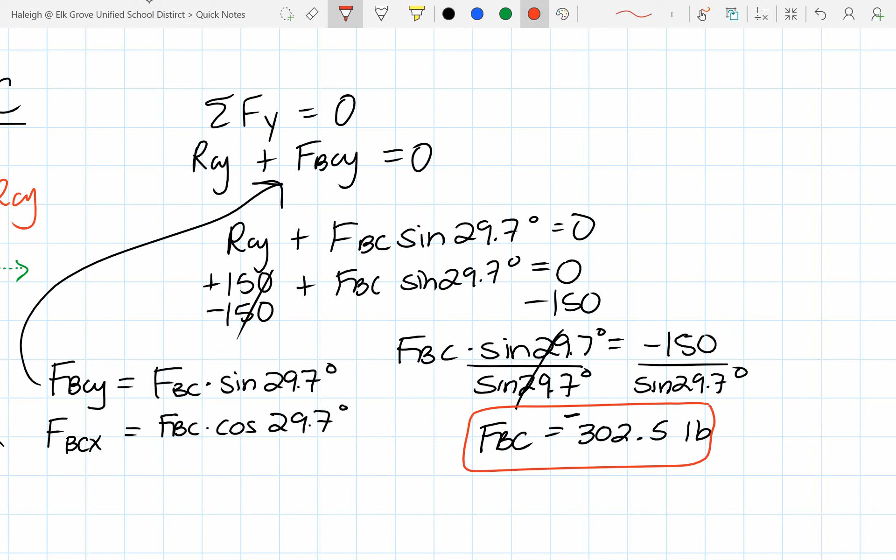Let's solve for FBC. Let's divide sine 29.7 on both sides. Okay, we get FBC all by itself. And plugging it into a scientific calculator, we get FBC to be about 302.5, negative. Which, remember, the negative - we only want to write the magnitude, so the amount, not the direction. So negative doesn't really matter.

But we care about the actual direction here. So instead of what we predicted, we know that we predicted FBC to be up this way. It's actually this way. So we need to get rid of all the other vectors that we have drawn that are incorrect. Well, don't get rid of too much like I just did.

So FBC is pointing this way, which makes sense. Now our free body diagram right here looks like it's in equilibrium. So that must mean since we changed the direction, it's a compression force, not a tension.

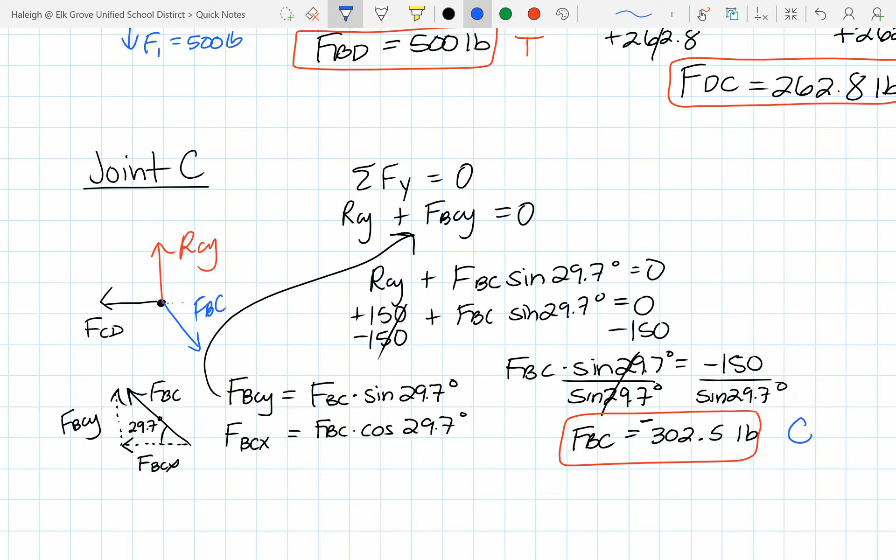We have to go back to our free body diagram, our original, and change the direction of both of those FBCs. So instead of up and to the left, it's down and to the right. And same thing with the other FBC - instead of down and to the right, it's up and to the left. And go ahead and erase the other incorrect ones.

And now we can look at each of our joints and see that they are all in equilibrium. Okay, don't forget to plug in that last force we just solved for into our summary box, which was 302.5, and it was a compression.

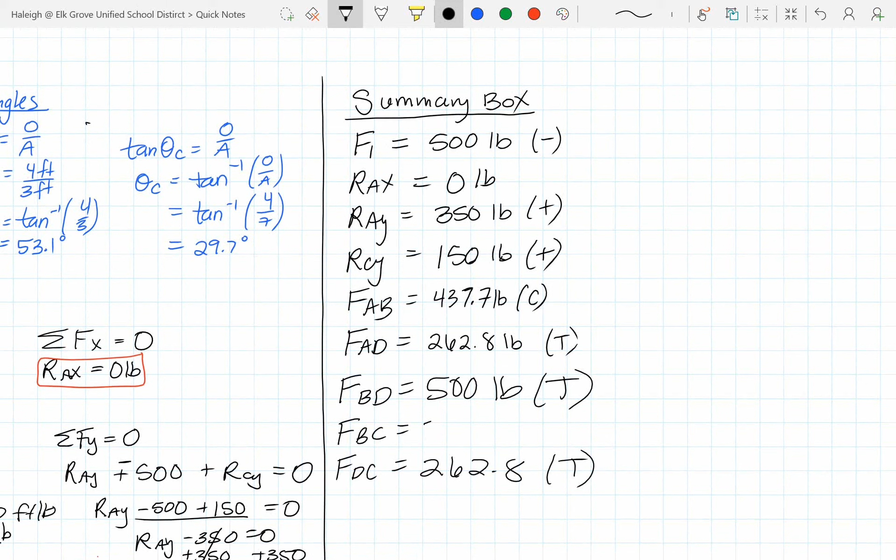Okay, we can't forget that our overall objective was to predict which of the members is going to break first if we are to apply a force at joint D. Well, how we look at that and how we predict it is based off of how much each of these forces are. FAB was 437.7, FAD was 262.8, FBD was 500, FBC was 302.5, and FDC is 262.8.

Whichever of those internal forces is the largest is the one most likely to break first. So that would be, in this case, FBD would break first. And that's this member right here.